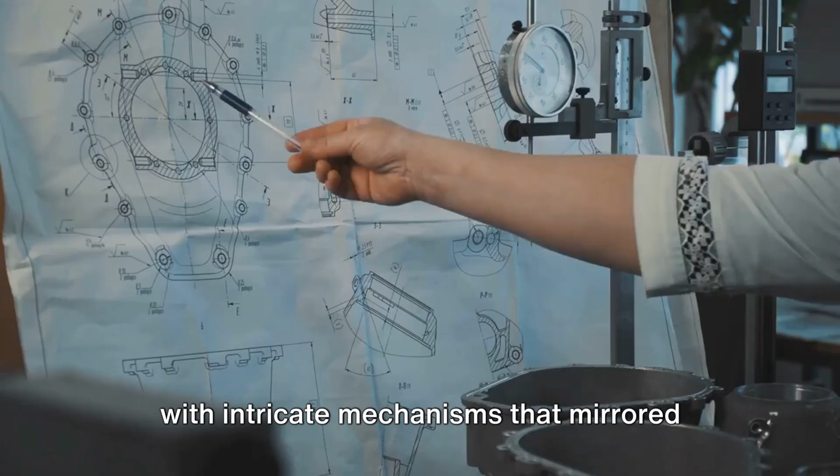Consider his sketches of war machines, armored tanks, giant crossbows, even a design for a robot. Then there were his flying machines, inspired by the wings of bats and birds, with intricate mechanisms that mirrored the anatomy of these creatures. These early designs, albeit crude by today's standards, reflected a mind that was perpetually innovating, consistently challenging the status quo.

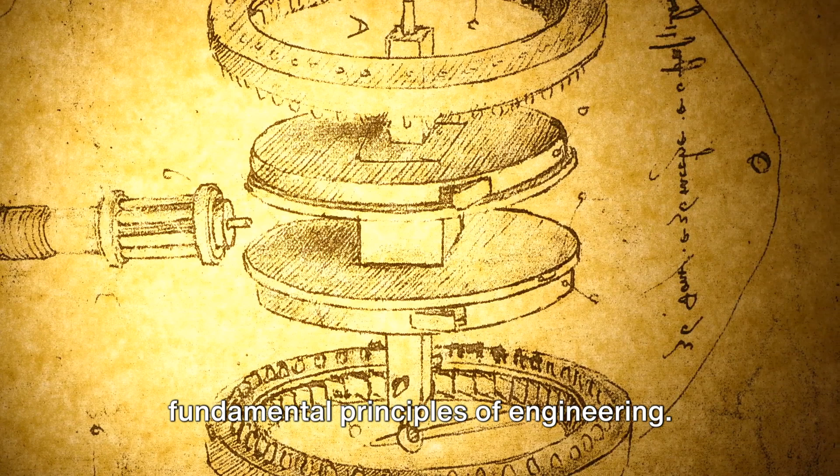Beyond the battlefield and the skies, Leonardo's sketches also delved into the realm of everyday mechanics. His designs of gears, pulleys, and screws are testament to his understanding of the fundamental principles of engineering. He saw potential in the mundane, transforming simple devices into complex machines that were both practical and ingenious.

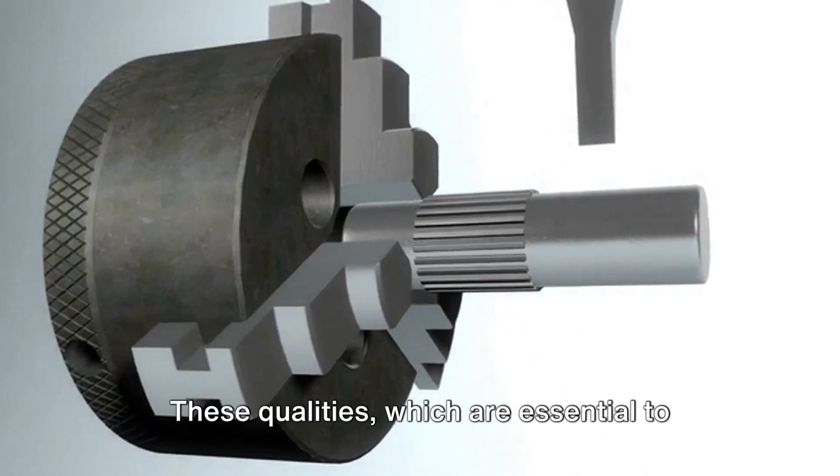Leonardo da Vinci was not just an artist or a scientist, but a visionary. His relentless pursuit of knowledge, his insatiable curiosity, and his innovative thinking were the bedrock of his genius. These qualities, which are essential to any engineer, were embodied by Leonardo centuries before the concept of engineering as we know it today was established.

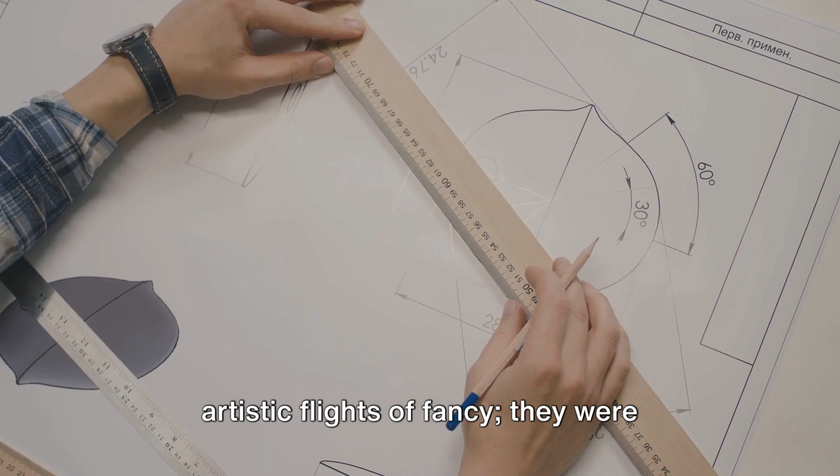In his formative years, Leonardo da Vinci's curiosity about the world around him sparked innovations that would later shape the field of engineering. Leonardo's sketches were not just artistic flights of fancy. They were blueprints for groundbreaking inventions. This is a statement that rings true when we delve into the ingenious creations that sprouted from the mind of Leonardo da Vinci. First on the list is Leonardo's design for a helicopter.

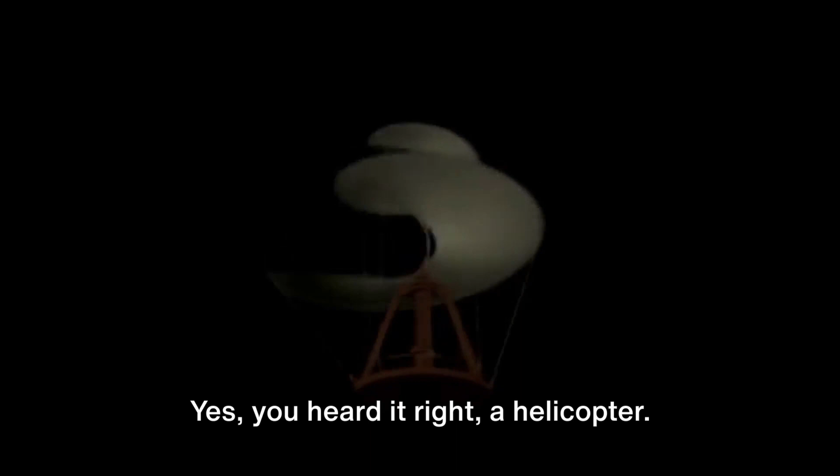Yes, you heard it right, a helicopter. More than 5 centuries ago, he conceptualized the aerial screw, a contraption that relied on the principles of a screw's rotation to achieve lift. While the materials of his era couldn't bring this idea to fruition, the concept itself was pioneering, laying the groundwork for what we now know as the modern helicopter.

Next, we have Leonardo's innovative design for a parachute. Unlike the conical parachutes of today, Leonardo's design was pyramidal in shape, made from linen and reinforced with wooden poles. His understanding of air resistance and the concept of drag, which were well ahead of his time, led him to design a device that could safely slow a person's descent from a great height.

And then there's the armored tank, a war machine that Leonardo envisioned would change the face of warfare. Resembling a turtle shell, the design featured a rotating turret and multiple cannons, powered by men inside turning cranks. While the practicality of this invention was questionable, the concept was revolutionary, predating the first fully functional tanks by almost 400 years.

Leonardo's understanding of physics and materials was instrumental in conceptualizing these designs. His observations and studies of the natural world allowed him to create designs that were far superior to anything of his time. His inventive mind and relentless curiosity laid the groundwork for countless technological advancements.

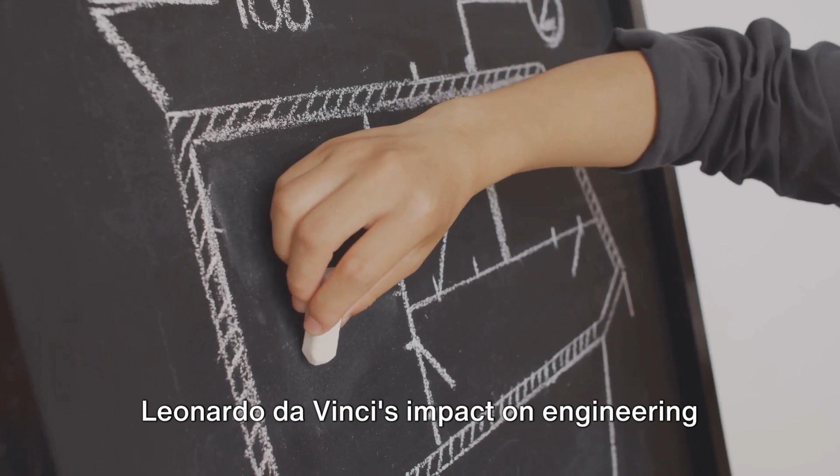Leonardo da Vinci's impact on engineering extends far beyond his lifetime, influencing the field to this day. His engineering sketches, once thought to be flights of fancy, have been resurrected by modern engineers who've used them to create real-world versions of his designs.

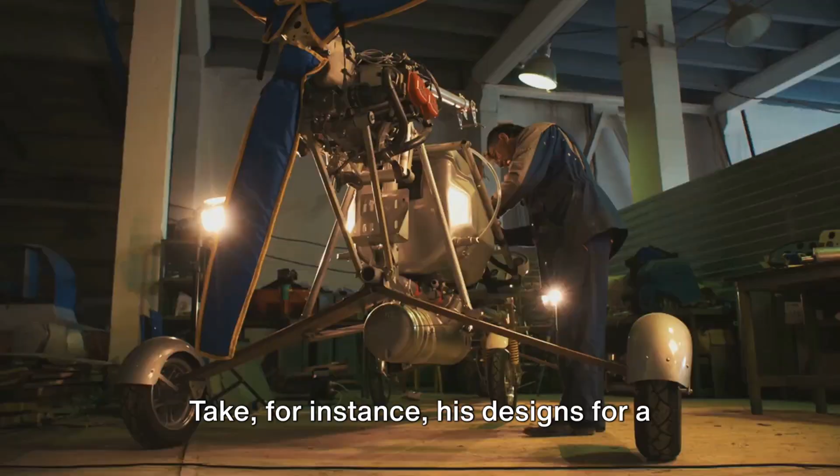Take, for instance, his designs for a helicopter-like air screw. It was a concept centuries ahead of its time, but now it's not hard to see the resemblance to the modern-day helicopter. Similarly, his designs for a self-propelled cart have been hailed as the forerunner to the modern automobile. But Leonardo's influence isn't confined to specific inventions.

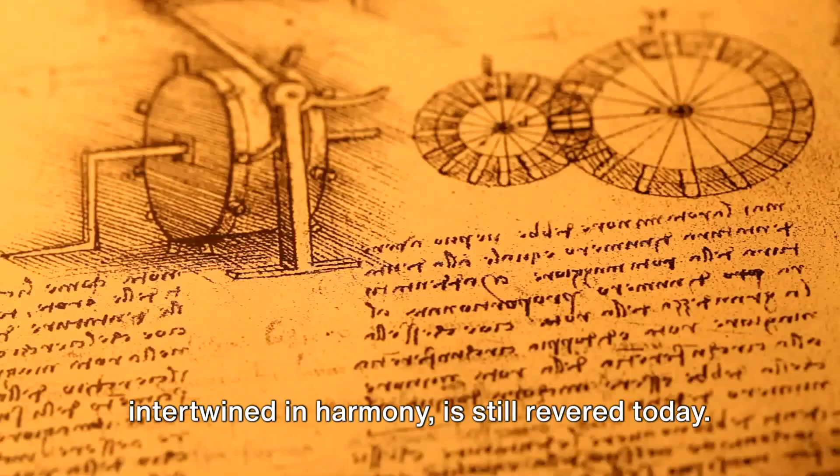His holistic approach to engineering, where art, science, and technology intertwined in harmony, is still revered today. He saw no boundary between these disciplines, and this seamless integration is something many engineers strive for in their work. Leonardo's ideas have lit the path of innovation in various fields.

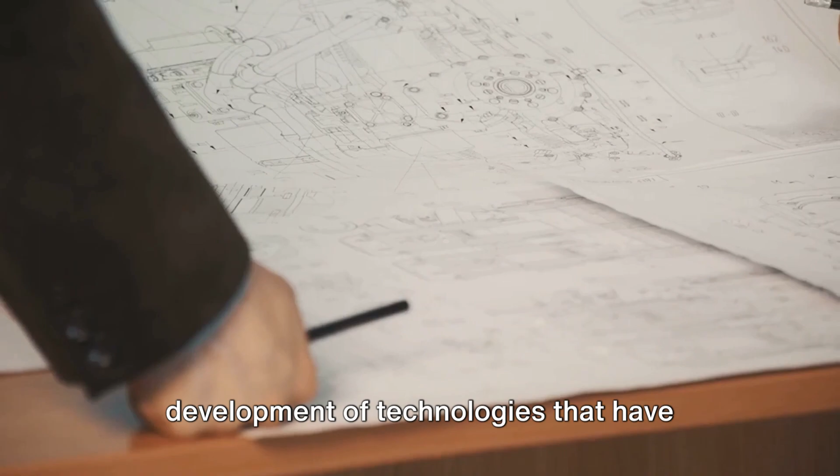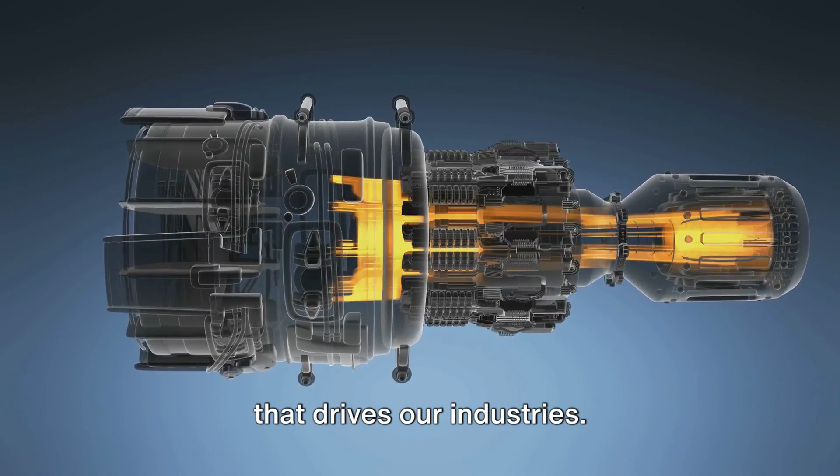In aerospace engineering, his designs for flying machines have inspired the development of technologies that have taken us to the skies and beyond. In mechanical engineering, his concepts of gears, pulleys, and hydraulics have been instrumental in designing machinery that drives our industries. And in civil engineering, his understanding of the principles of structures and materials has left a lasting impact. His notebooks, filled with sketches and ideas, are still studied by engineers and scientists, providing a treasure trove of inspiration.

In conclusion, Leonardo da Vinci, an artist, scientist, and engineer, left an indelible mark on the field of engineering, inspiring generations of innovators to push the boundaries of what is possible. His legacy is not only in the inventions he left behind, but also in the mindset he embodied, a mindset of curiosity, creativity, and relentless pursuit of knowledge.